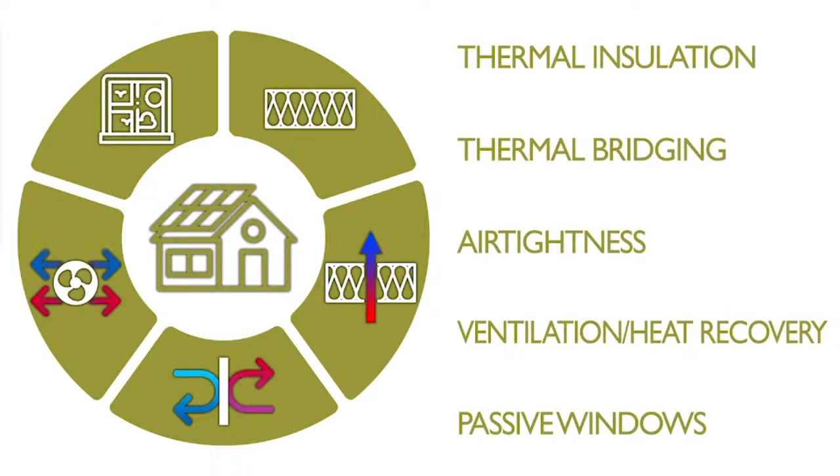Ideally, the space heating and cooling energy requirements can be reduced to the point that passive sources such as solar gain and heat from the building occupants are sufficient for most of the time. The Passive House Institute provides software known as the Passive House Planning Package, or PHPP, to calculate these energy loads, and provides prescriptive guidance and details along with product certification.

Whilst this approach certainly simplifies the process and ensures rigorous adherence to good or best practice, it does not always allow designers the necessary flexibility to balance the full range of project requirements. In such cases, the Passive House guidance and principles can be viewed as best practice recommendations for designing buildings assessed by other means such as national building regulations.

The Passive House guidance itself is fully open source and fully available, so there's no need for official approval to undertake a Passive House project. That said, the verification and certification services provided by the Passive House Institute can serve to greatly simplify the planning and approvals process for such buildings, and reinforce confidence and trust with subsequent buyers and sellers.

So let's now consider how the 5 basic principles can be applied, and what they mean. Thermal insulation is what limits the loss of heat from the building envelope, and is the cornerstone of the fabric-first approach to building design. This approach seeks to maximise the performance of the basic components of the building, rather than relying on mechanical or electrical systems.

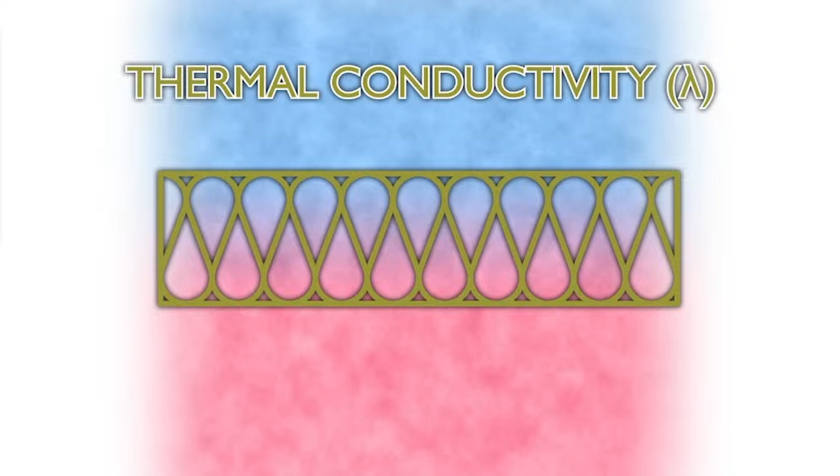The fundamental physical property of insulation material is their thermal conductivity, also known as the K value or lambda value. This property measures how well heat can flow through the material by conduction. In this mode of heat transfer, the heat energy is transferred between the individual molecules of a material by direct contact. Because of this reliance on physical contact, there's a correlation between a material's density and its thermal conductivity.

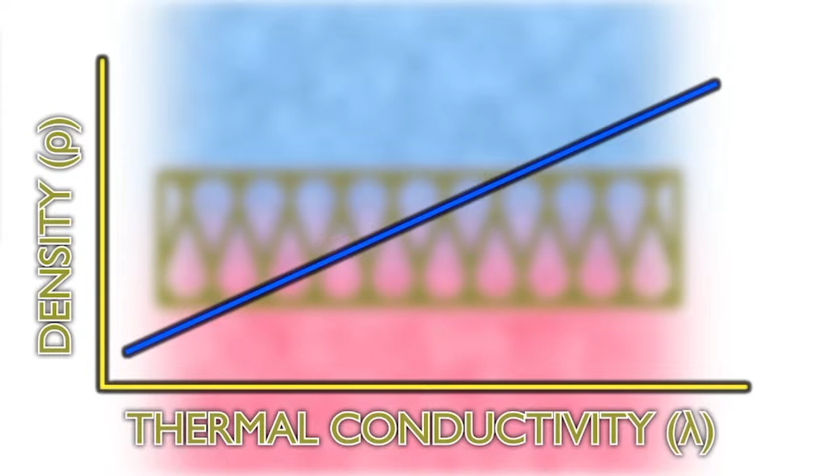Therefore, less dense materials such as foams and fleeces are less able to conduct heat than denser materials like bricks or concrete. Bricks, for example, have a thermal conductivity of 0.77 watts per metre Kelvin, whilst aerogel insulation is far lower at 0.015 watts per metre Kelvin.

Some materials, for example blown rigid foam insulation, may have a thermal conductivity that varies over time as blowing agents escape from the foam structure, so it's important to ensure the correct thermal performance figures are used. Third-party product certification or UKCA documentation will typically give aged performance values if they're relevant to the application.

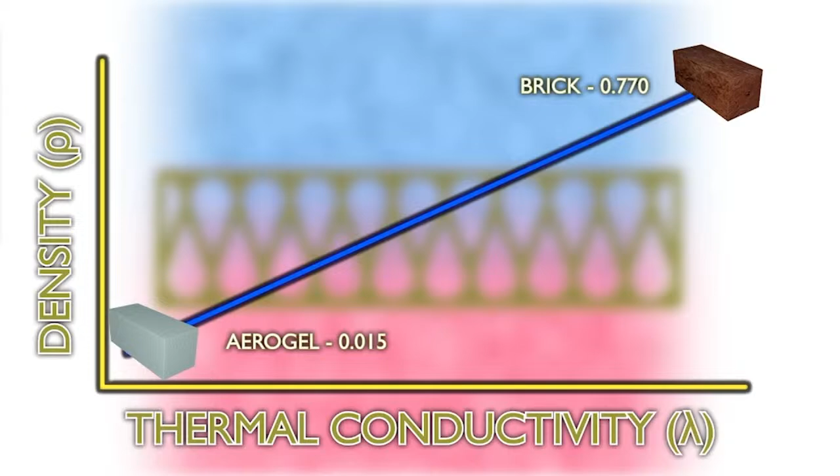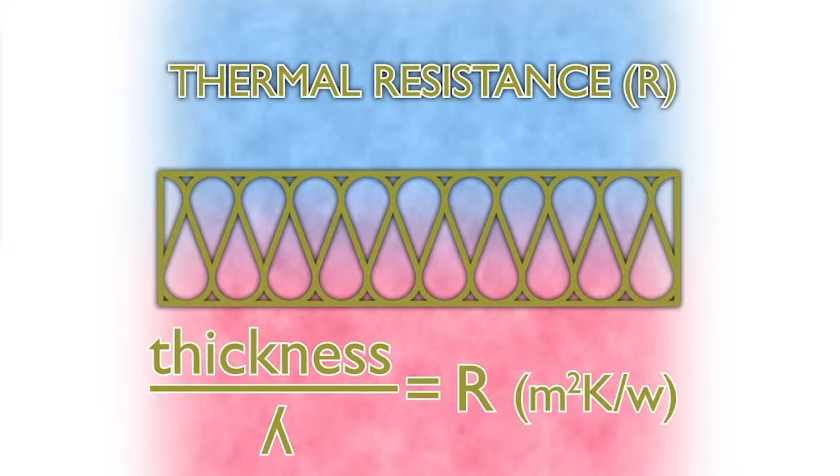Thermal conductivity, however, only looks at the basic material. It doesn't account for the thickness. To factor in the material thickness, we take the thickness in meters and divide it by the thermal conductivity to give us the thermal resistance, or R value, in meters squared Kelvin per watt.

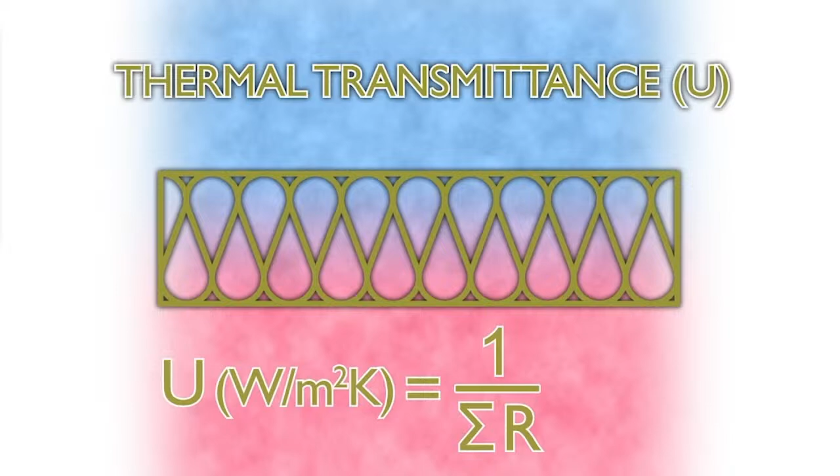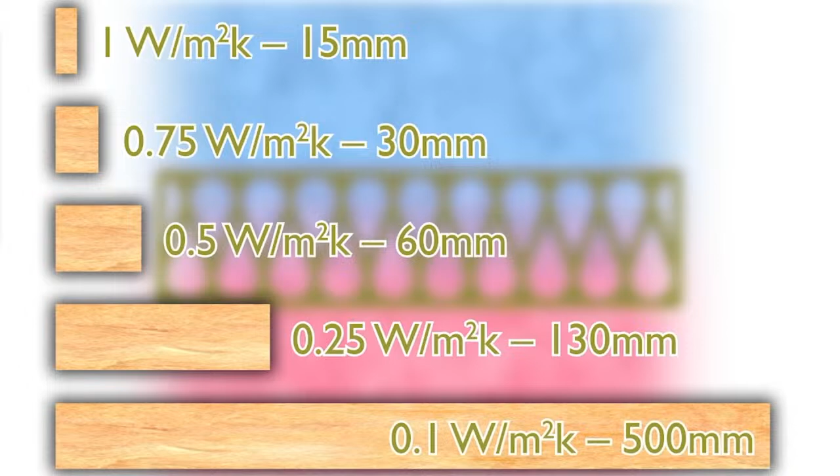The next step is to convert that into a value for an entire wall, for which we use the thermal transmittance, or U value, which is the inverse of the sum of the R values for the different layers in the construction. U values are quoted in watts per meter squared Kelvin. Where R values vary proportionally to thickness of materials, U values do not, so as we move to lower U value, we need to add exponentially more insulation to improve them further.

As an example, the limiting fabric parameter, more commonly referred to as the backstop or worst permissible U value for a wall, given in Approved Document L for England, is 0.3 watts per meter squared Kelvin, and the recommended worst case for passive house is 0.15. The best practice passive house value is considerably lower at 0.06. In practice, compliance with either standard is more complex than achieving a simple maximum U value, but roughly speaking, the worst case U value for a passive house would be considered pretty good under national building regulations.

A thermal bridge occurs either where a material of higher thermal conductivity intersects a less conductive material, or where building elements join, such as at floor zones or corners.

Thermal bridges have two principal negative effects. Firstly, they increase the overall heat loss by providing an easier pathway for heat to escape, and secondly, they create cold spots internally. Condensation and mold growth can occur in these areas, which has a detrimental effect on the indoor environment. The first of these, typically where structural elements like studs in a timber frame wall intersect the insulation, is accounted for via an adjustment in the U value calculation.

This takes the thermal conductivity and proportional area of the bridges and adjusts the U value accordingly.

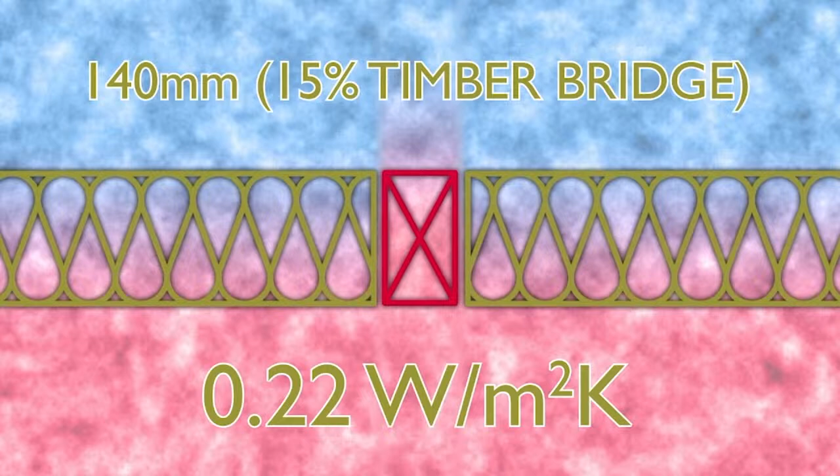If we consider a 140 mm thick panel of rigid foam insulation, if we use this in a typical timber frame wall, the U value when adjusted to account for cold bridging at the timber stud will work out to around 0.22.

On the other hand, if we eliminated this cold bridging but used the same thickness of insulation in, for example, a structural insulated panel system, the U value drops to 0.15, purely due to the lack of repeating thermal bridging at the studs.

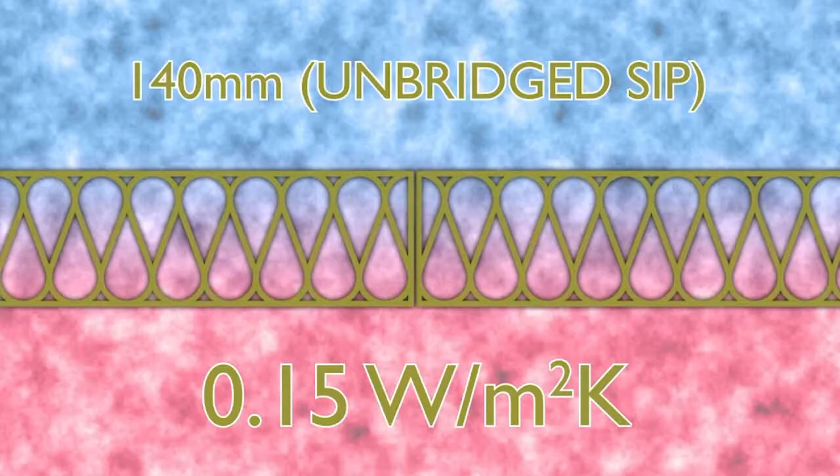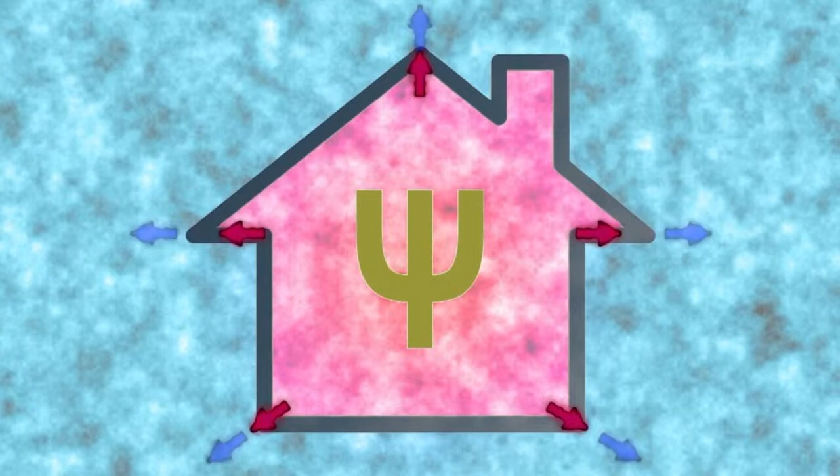Thermal bridging at corners and junctions is accounted for using an additional value for linear thermal bridging, known as a psi value, but in most cases these are addressed using standardized pre-assessed details to limit heat loss.

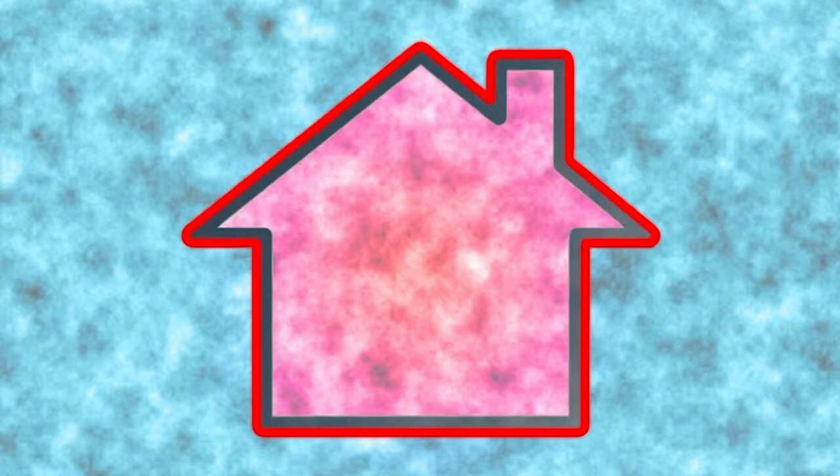The easiest way to visualize the way thermal bridge-free design works in practice is to simply imagine drawing a pencil line around a cross-section of the entire heated envelope of a building. If that can be done without touching anything other than insulation, the design is free from thermal bridges.

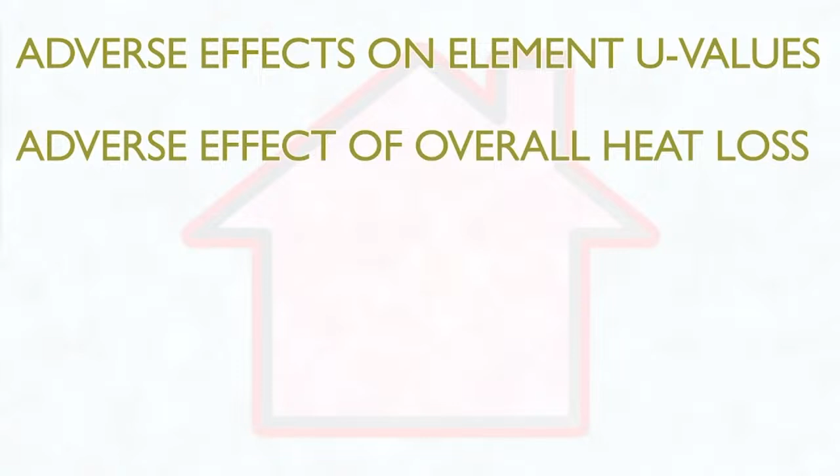Because of the adverse effect that thermal bridging has on both the U value of individual elements and the overall energy performance, whether assessed via PHPP or SAP, reducing cold bridging in low-energy buildings is a matter of not just principle, but also practicality. Getting U values anywhere close to passive house best practice performance levels without restricting thermal bridging is virtually impossible.

But even in cases where designers are aiming for lower standards, the benefits regarding limiting localized condensation are clear. Whatever the assessment criteria, high-performance insulation systems like those that incorporate aerogel insulation have a very important role to play in minimizing thermal bridging by allowing the thermal resistance to be maximized at any given point.

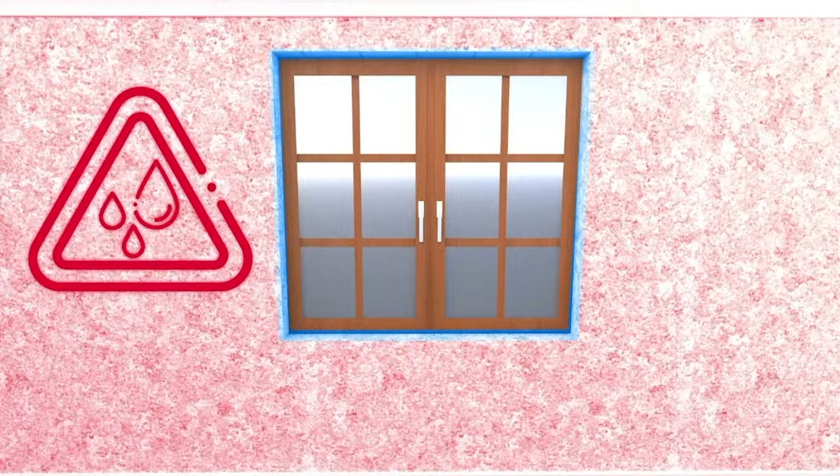In locations such as window reveals and door openings, it can be difficult to maintain a similar level of insulation to that found over the main sections of a wall, leading to these areas being relatively cold. In extreme cases, this can cause the temperature to drop to the point where condensation may occur in these areas, and as fabric insulation levels increase, so does the importance of continuity and uniformity.

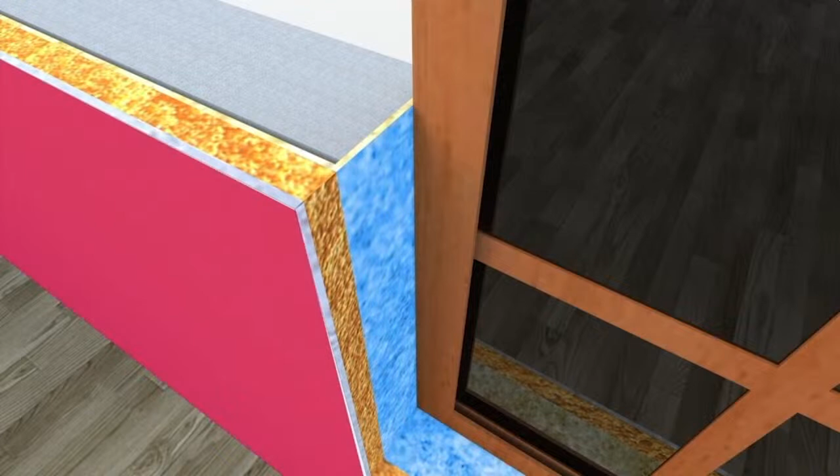Ultra-thin internal wall insulation (IWI) systems that use aerogel insulation provide high thermal resistances in minimal thickness, allowing for a more uniform envelope of thermal insulation performance and minimizing localized drops in R values around complex features. The fire-rated IWI systems also allow this continuity to be maintained where reduced combustibility is required.

This offers significantly higher performance per unit of thickness than conventional fire-rated insulation, such as mineral fibre. Fibrous insulation quilts typically have a thermal conductivity in the range of 0.035 to 0.044 watts per metre Kelvin, whilst aerogel is 0.015 to 0.019, meaning like-for-like performance can be achieved in less than half the thickness.

While big thicknesses of insulation are expected and accounted for in passive and low-energy projects, it's not always possible to maintain such thickness over every part of the structure. Aerogel insulation systems can allow this uniformity to be achieved, and being of comparable permeability to fibre quilt, this can be achieved without compromising moisture movement.

This need to create uniformity of insulating values and prevent cold spots is also an important aspect to consider when specifying the windows in low-energy and passive projects.

When using systems such as aerogels, all product details and installation practices should be reviewed in the context of the Control of Substances Hazardous to Health 2002 regulations. Manufacturers' installation guides and material safety data sheets should be consulted, and such products may require different installation practices when compared with traditional insulation materials. Therefore, specific data for the specified product should be reviewed.

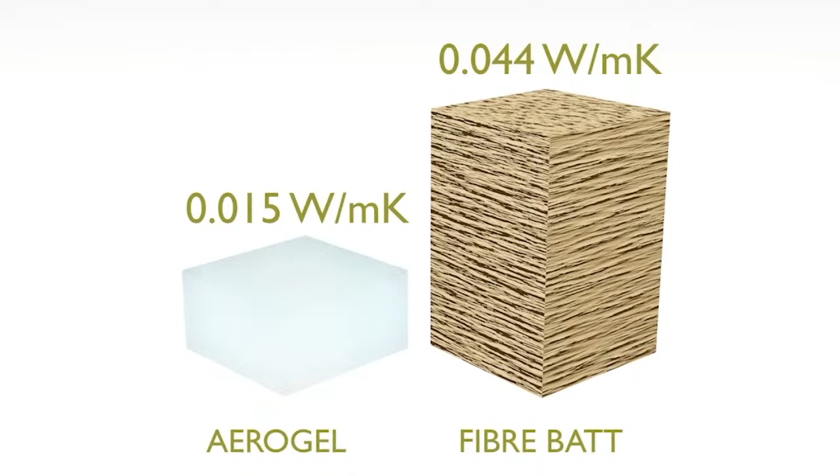While raw silica aerogel is inert and non-combustible, fibrous composite aerogel insulation of the type typically used in construction applications is available with a range of reaction to fire classifications, from Class C to Class A1, depending on the fibrous carrier matting used. For context, most mineral fibre insulation products fall into Class A1 or A2.

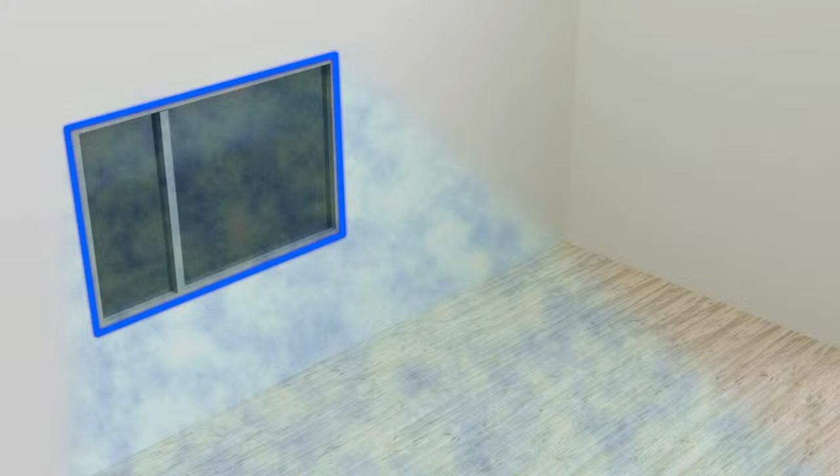Passive and low-energy homes must pay particular attention to the specification of windows used, as poorly insulating windows can not only affect the overall heat loss, but as with cold bridges, can also create cold spots and cold radiation. This phenomenon occurs when the influence of a cold surface can be felt nearby, often leading to a perception that a space is colder than it actually is.

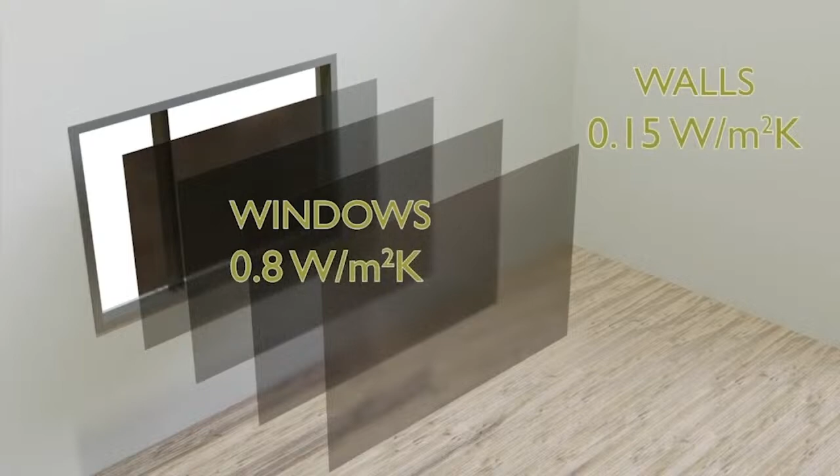Even by utilising multiple layers of glazing, inert gas fills and thermally reflective coatings, windows still typically fall a long way short of the performance of the rest of the building envelope, with the passive house specifications calling for windows with a U value of 0.8 watts per metre squared Kelvin or less, significantly above the opaque elements.

Windows are also important to provide heat input to the building via solar gains, and for this reason passive houses in heating climates like the UK tend to position the majority of glazing facing south in order to maximise this effect. This requirement to maximise collection of solar heat has to be carefully managed though, as highly insulated and airtight homes can be susceptible to overheating if this is not carefully assessed and managed.

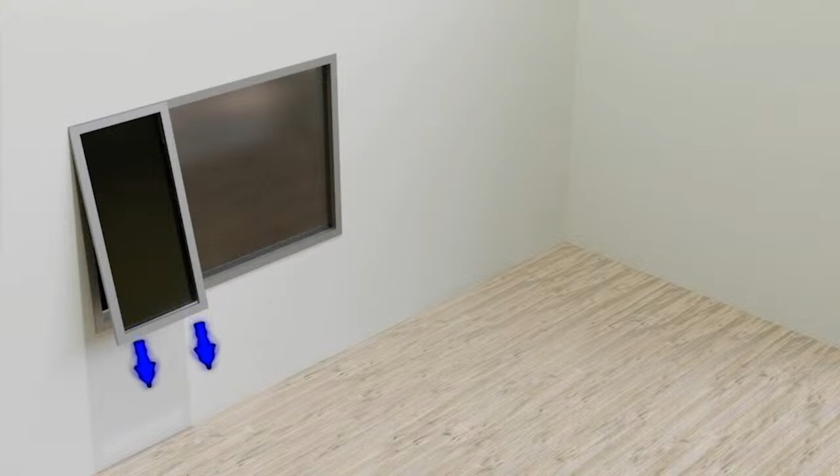It's a common misconception that passive houses do not have opening windows, but in fact the specifications call for at least one opening window per room in the living spaces. Opening windows is among the most cost-effective and simple means of counteracting overheating, and is useful to prevent poor indoor air quality in exceptional circumstances such as large gatherings.

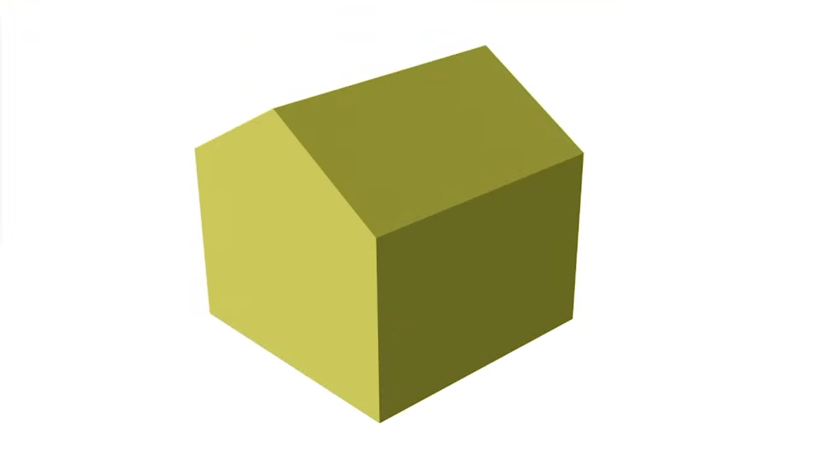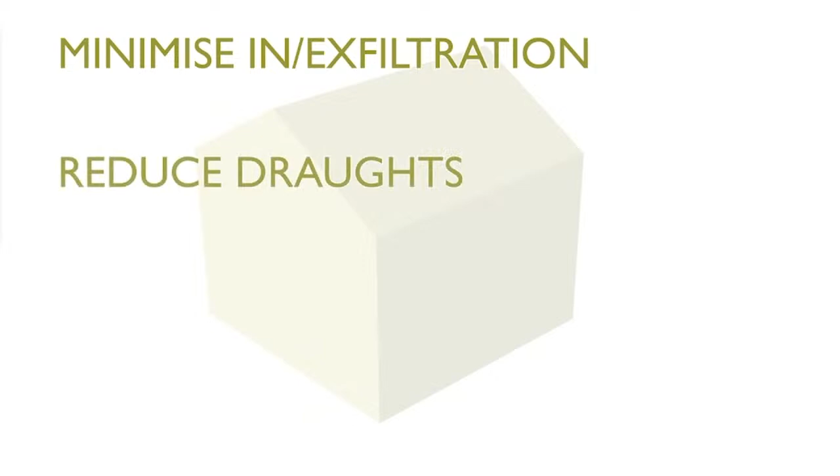That leads on to the next concept we need to consider: the airtightness of the structure. It's often said that airtight buildings can be like living in a plastic bag. However, this is a fundamental misunderstanding of what we mean by airtight buildings. Reducing air leakage simply means eliminating sources of air infiltration and exfiltration over which we have no control, draughts in other words.

A good supply of fresh air is a critical component of healthy indoor environments, and the passive house specification is designed to ensure this is facilitated by controlled and carefully managed ventilation systems with carefully considered impacts on energy performance.

Uncontrolled air movement should be reduced as far as possible. As we've already covered, the thickness of insulation layers increases exponentially with reductions in U value, and after a certain point this becomes both uneconomical and impractical, even in explicitly low-energy buildings. So it's very important that every other factor affecting energy performance is controlled and limited to minimise energy usage.

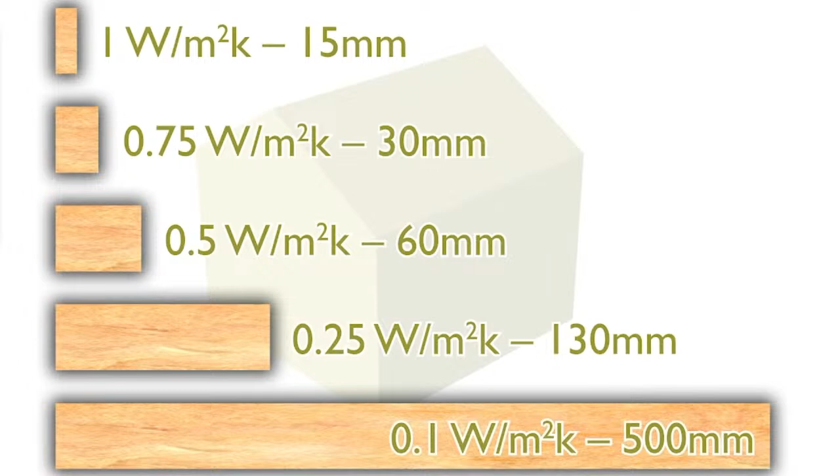In dwellings, there are two main drivers of air leakage: the internal stack pressure caused by the relative buoyancy of warm air and resultant convection, and external forces from the wind. Because warm air is less dense, it will rise upwards in a building and can leak out of any air pathways found at higher levels. Correspondingly, as this air rises, colder air must be drawn into the building lower down.

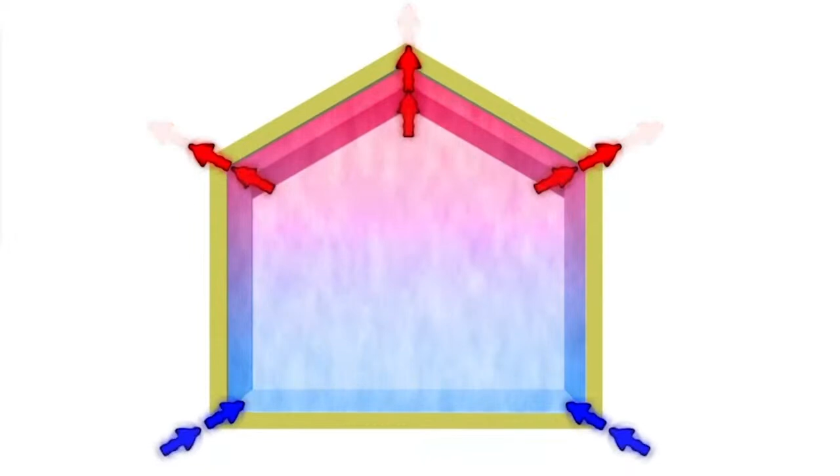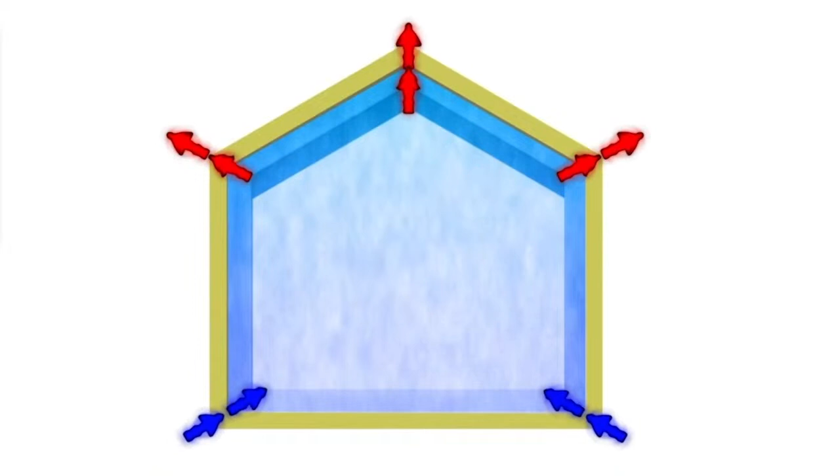As the warmer air will contain significantly more moisture, this outward air leakage could lead to condensation issues as the air leaking cools and deposits liquid water. The cooler air entering the structure lower down will lower the internal temperature in the building, necessitating energy input to maintain the temperature of the habitable space.

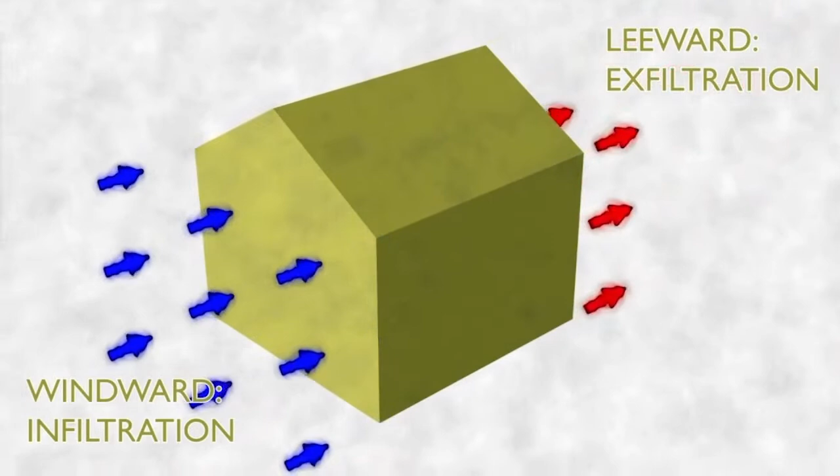Externally, the wind forces acting on the building will have similar effects, but instead of the pressure gradient working from top to bottom, it will be aligned to the wind direction. Cold air will be pushed in on the windward side where there is a positive pressure, and warm, moist air sucked out on the leeward side where the pressure is negative.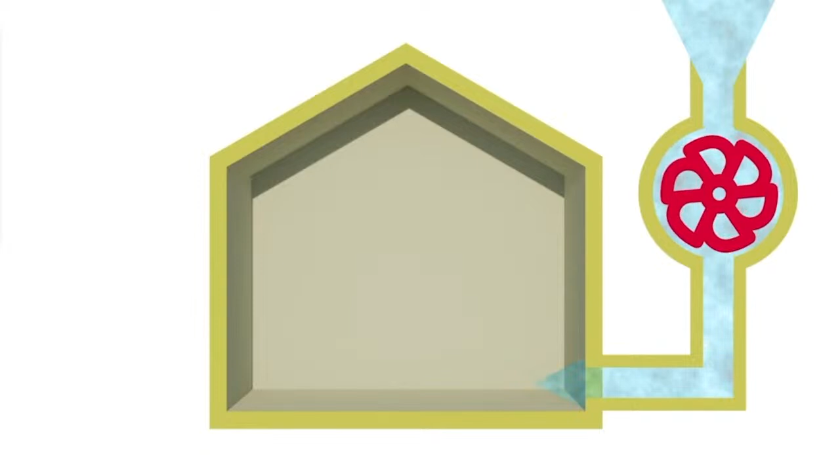Limiting this air movement is a critical part of low-energy design, as even highly insulated buildings will have poor energy performance if the movement of air is not controlled.

Both the building regulations and Passive House standards therefore include pressure testing and minimum performance levels, but there are some important differences. The UK building regulations use a pressure test result known as AP50, which is the volume of air in cubic metres that flows through the building fabric area in square metres in 1 hour, when a reference pressure of 50 pascals is applied.

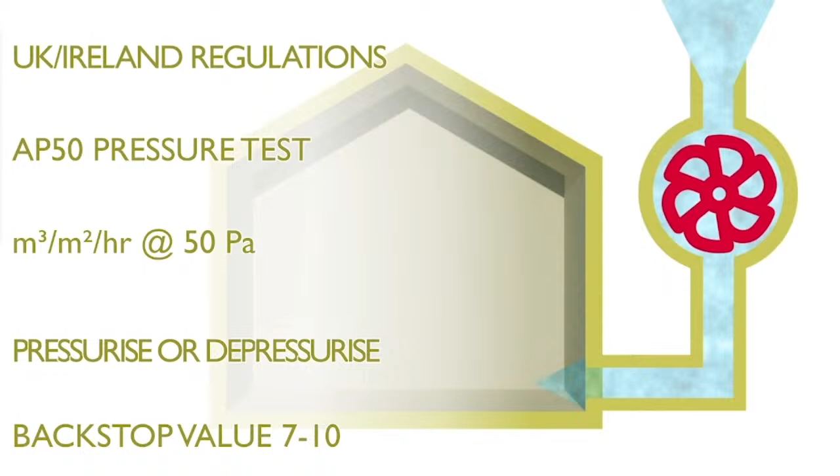This pressure can be applied in either direction, by pressurising or depressurising the building. The backstop value for this is 10 metres cubed per square metre per hour in England, Wales and Northern Ireland. In Scotland and the Republic of Ireland, the preferred or reasonable limit is set at 7, and while it's theoretically possible to comply with a higher value, the necessary trade-offs will generally be unacceptable.

Passive House expresses the air leakage differently, using a standard called N50, which is the air changes per hour through the building's internal heated volume, at the same 50 pascal reference pressure. In Passive House tests, however, the pressure must be applied in both directions, pressurising and depressurising the building, and the two results averaged. The test equipment and physical procedure is largely the same for both AP50 and the N50 test.

So it's perfectly possible to run both simultaneously. But the way the final results are calculated is sufficiently different that conversion between the two is just not possible without access to the source data.

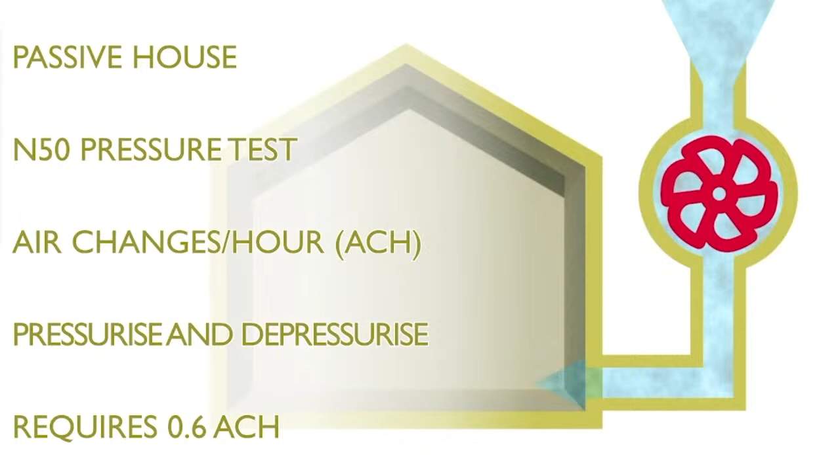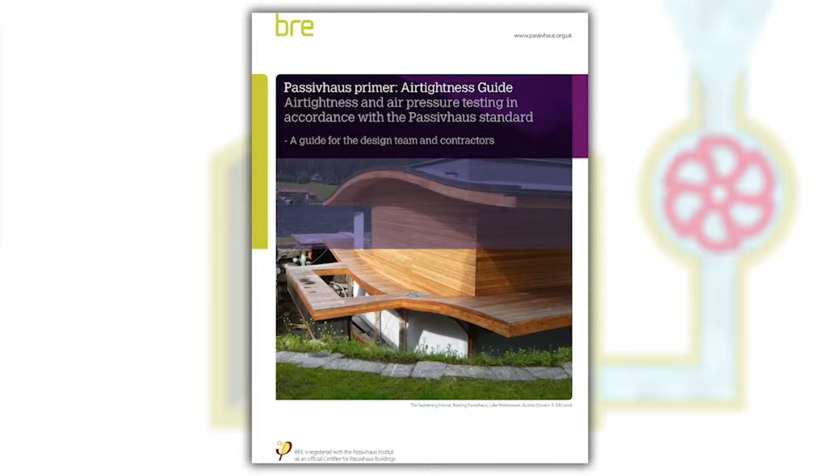The BRE's Passive House Airtightness Primer document, highly recommended as follow-up reading, gives a useful analogy to illustrate the difference in standards. A building with an air leakage rate roughly meeting the UK regulations limiting value of 10 metres cubed per square metre per hour, AP50, will have gaps and cracks equivalent in area to one 20 pence piece per square metre of the floor area. In contrast, a Passive House meeting the required 0.6 air changes per hour N50 standard will have gaps equivalent to an area of a 5 pence piece every 5 square metres of floor area.

Airtightness and vapour control. There are numerous ways of making a building airtight, and finding the most appropriate method to apply it to a given project is usually a matter of balancing a variety of competing requirements. The most important of these is considering the effects of reducing air leakage on the transfer of moisture around the building. Historically, most buildings had high levels of airflow, both intentional and incidental, for example from open chimneys. Modern buildings where this airflow is not present require more careful, holistic consideration of hygrothermal properties in relation to air movement.

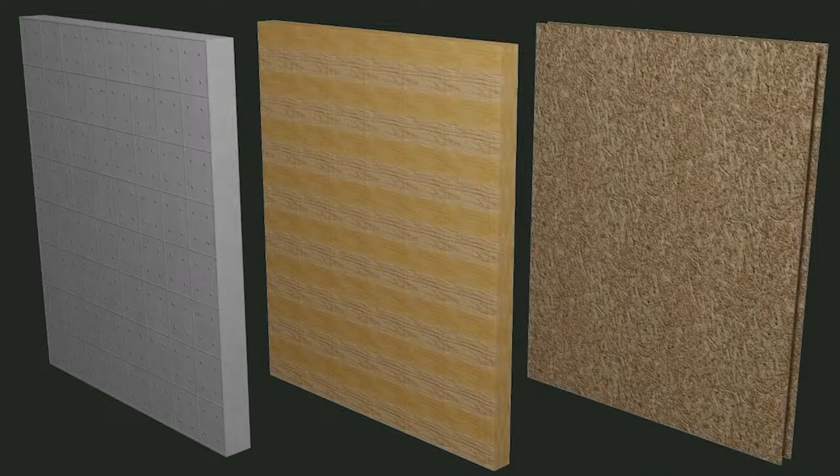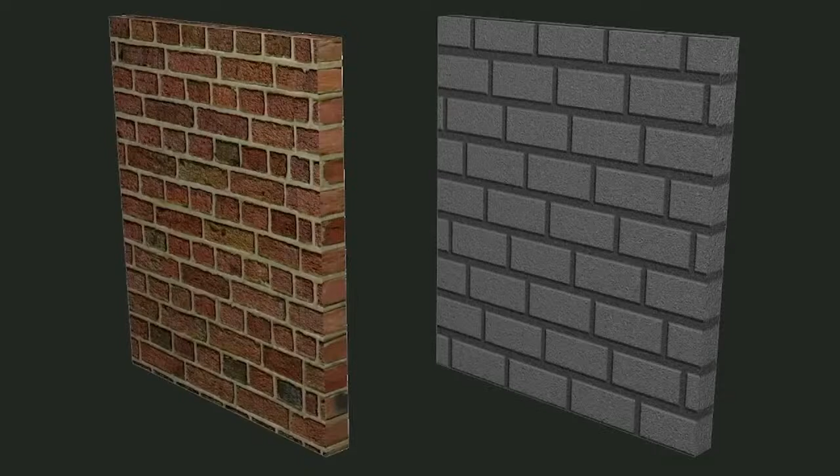Some building materials such as cast concrete, cross-laminated timber and structural insulated panels have an inherent advantage when it comes to air leakage, as the basic materials involved have low air permeability. Others, like blockwork or brickwork, are more permeable, so require additional measures to control air leakage. In all cases, though, junctions, services and the nature of the on-site assembly process still pose challenges to achieving a low air leakage rate, even when using the most impermeable base materials.

Air leakage performance cannot be considered in isolation, and in parallel it's critical to address moisture control. This is covered by Part C in England and Wales, Section 3 in Scotland, and Part F in the Republic of Ireland. It's also Part C in Northern Ireland, but this is a different set of regulations to that used in England and Wales. In all four cases, specifiers are referred to British Standard BS 5250.

This document, the most recent edition of which is BS 5250-2021, is the Code of Practice for the Management of Moisture. Prior to the 2021 edition, this was simply control of condensation, but this has now been expanded to cover all sources of moisture that can affect buildings. This reflects an increasing recognition that the effects of heat transfer and the flow of air and moisture around structures are interlinked and should be considered holistically at the design stage.

To this end, the standard also defines connective and systemic effects. Connective effects being the effects of changing conditions at junctions between different building elements, and systemic being effects of an action on the whole building or parts not directly connected, due to changes in the hygrothermal condition of the inside of the building. Both these serve to raise awareness of the interconnected nature of moisture in buildings, although the standard does note that assessment methods for the impact of these effects is currently at an early stage.

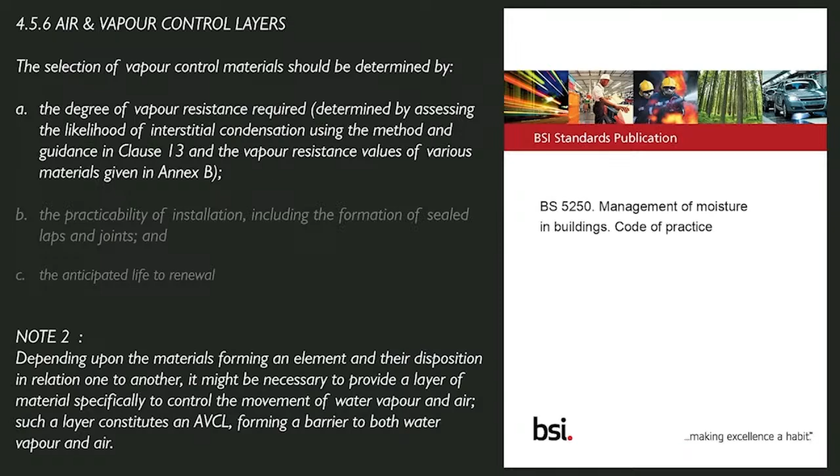The second important consideration is the practicality of installation, basically how easily the theoretical design can be realised on site. BS 5250-2021 introduces the concepts of ADT performance, or as-designed theoretical, and ABIS performance, as-built in service. This is an important distinction as these can be very different. In terms of AVCL performance, this relates mainly to the simplicity of sealing laps and penetrations, and whether or not the need for complex and difficult installation processes can be designed out. It's also important to ensure the design and subsequent installations are robust enough to meet their lifespan requirements.

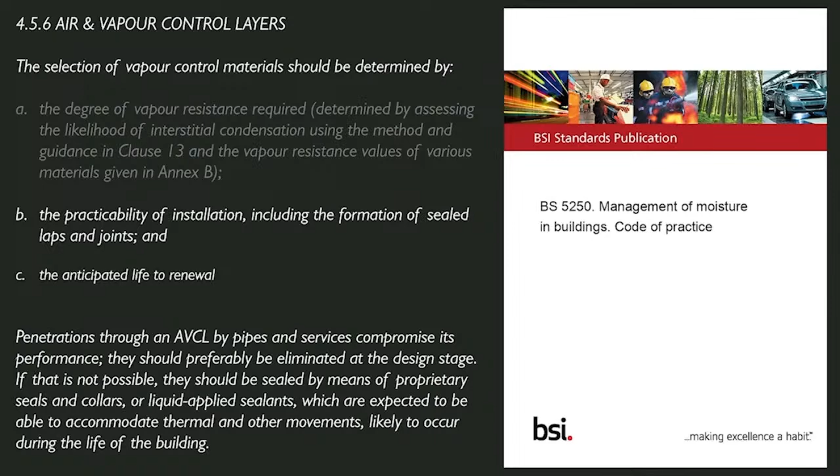Lastly, in Notes 3 and 4, BS 5250-2021 illustrates the many forms air and vapour control layers can take. In essence, every layer in the building element plays a role in the management of air and vapour transfer to some extent. Assessing and balancing the performance and practicalities of each part is key to a successful design, and this is particularly true at the higher levels of performance required by passive and low-energy buildings.

Note 4 also clarifies that while most specific AVCL membranes tend to be impermeable to both air and vapour, it's also possible for membranes to be airtight yet vapour permeable. This again gives designers important flexibility in where they position and how they install the airtight layer, as the air control and vapour control functions can be separated and performed by a variety of components throughout the element. We'll come back to this later, but now let's consider the assessment of vapour transfer.

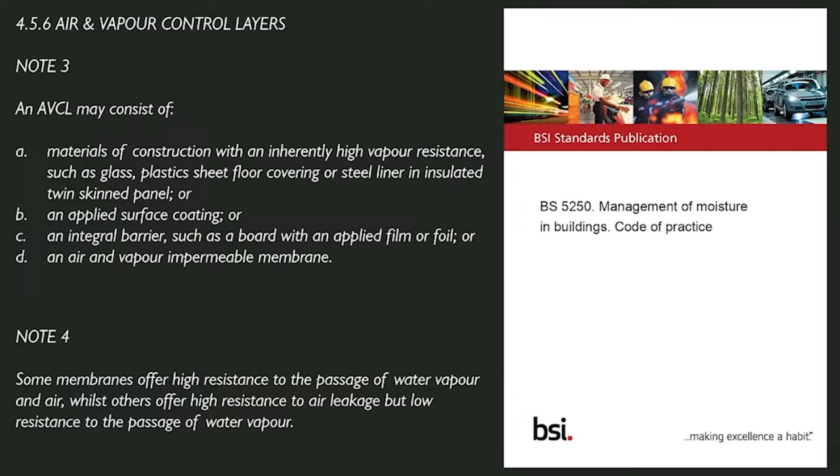BS 5250-2021 references two standards for condensation risk: BS EN ISO 13788-2012, Hygrothermal Performance of Building Components and Building Elements, Internal Surface Temperature to Avoid Critical Surface Humidity and Interstitial Condensation Calculation Methods; and BS EN 15026-2007, Hygrothermal Performance of Building Components and Building Elements, Assessment of Moisture Transfer by Numerical Simulation.

The simplified Glaser method, given in BS EN ISO 13788-2012, is considered by BS 5250 to be generally acceptable for most types of constructions. However, BS EN 15026-2007 can be used to gain greater detail as to the hygrothermal performance.

In the Glaser method, the thermal and vapour transfer properties of the various materials and simplified environmental conditions are used to model the temperature gradient through the element and also the dew point line. Dew point is the temperature at which the air will become saturated and condensation will occur.

In our example wall here, a cross-laminated timber panel with insulation external to the structure, the dew point will generally occur in the outer ventilated cavity, if at all. This is because the insulation is positioned such that it keeps the more vapour-resisting inner layers warm enough to prevent condensation. This makes this type of wall a very robust hygrothermal solution where high levels of insulation are required.

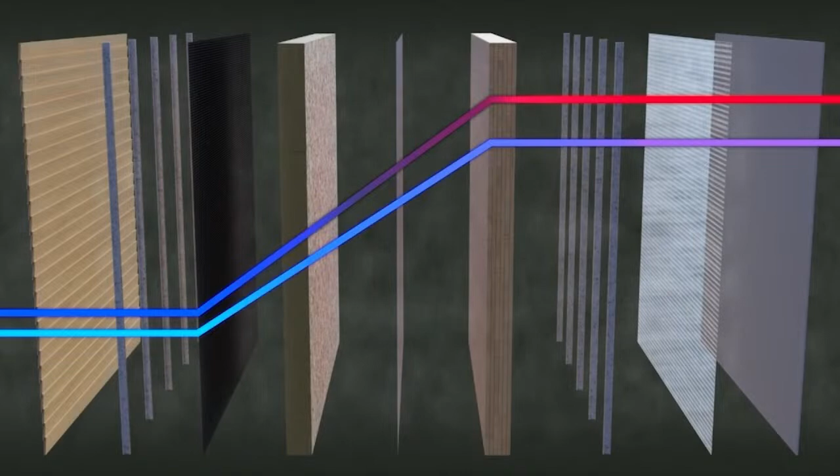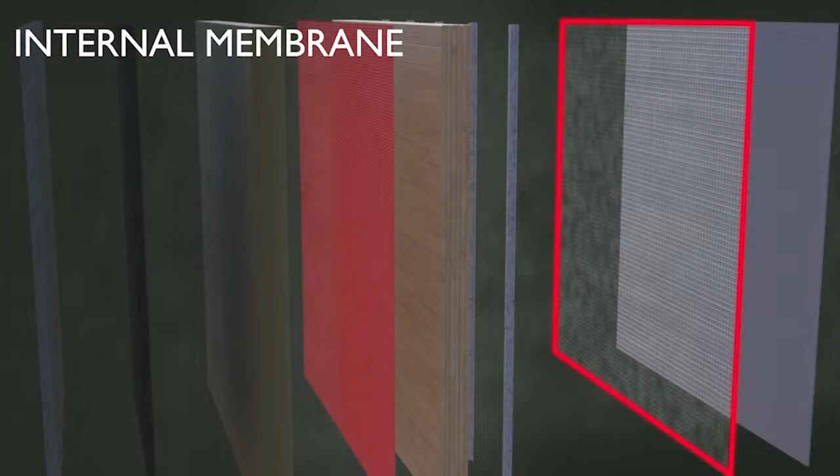Let's now move on to consider how the positioning of construction membranes in a wall affect the required performance characteristics. Firstly, we have the traditional vapour control layer position on the warm side of the insulation. This is the most common approach historically, and membranes used in this location are usually airtight and vapour impermeable. This approach works by ensuring warm, moisture-laden air cannot reach the colder outer parts of the wall construction where it can condense.

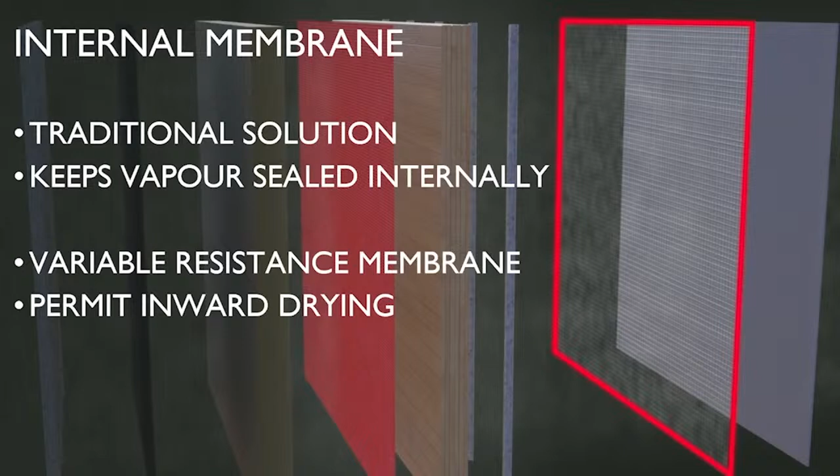Variable vapour resistance membranes have become available that can become more or less vapour permeable in response to environmental conditions. These membranes block the passage of moisture vapour in winter when condensation risks are highest, but allow some degree of moisture transfer in warmer summer conditions. This can help the building fabric dry out in either direction, helping remove construction moisture and moisture from external sources such as rainfall. The principal downside to this location of membrane is in the detailing and sealing required during installation.

Internally, there are substantially more penetrations for services and structural elements. While this can be mitigated to a certain extent by using service voids, relocating service runs away from external walls, or using a variety of tapes and gaskets, this still introduces additional complexity throughout the process.

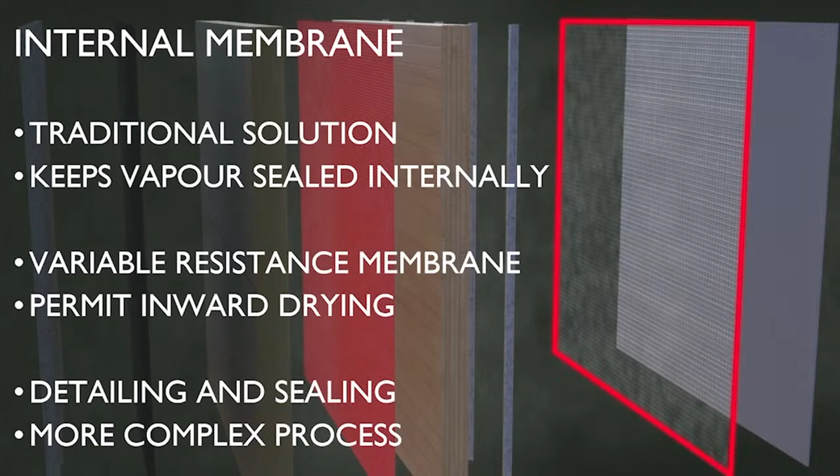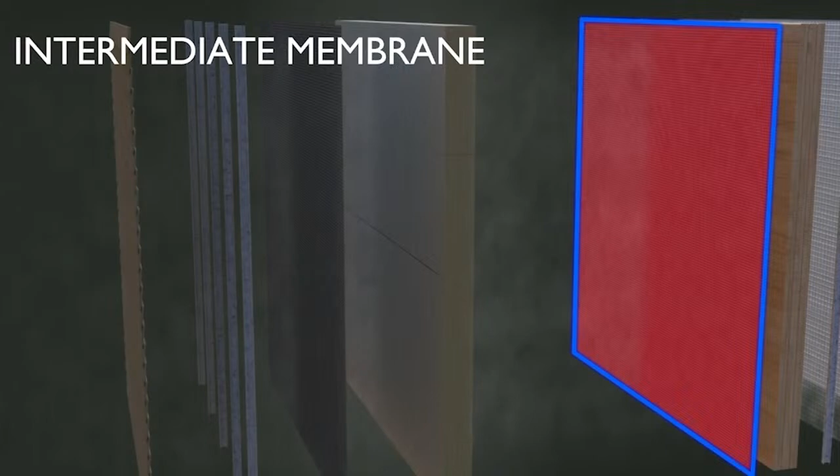If we move the airtight layer to an intermediate position in the construction, such as over a structural insulated panel, or as shown here over cross-laminated timber, we can greatly reduce the number of services that need sealing, and possibly also simplify sealing membrane joints and laps, as there would typically be a more solid substrate to fix against. If the membrane is self-adhesive, this process becomes easier still.

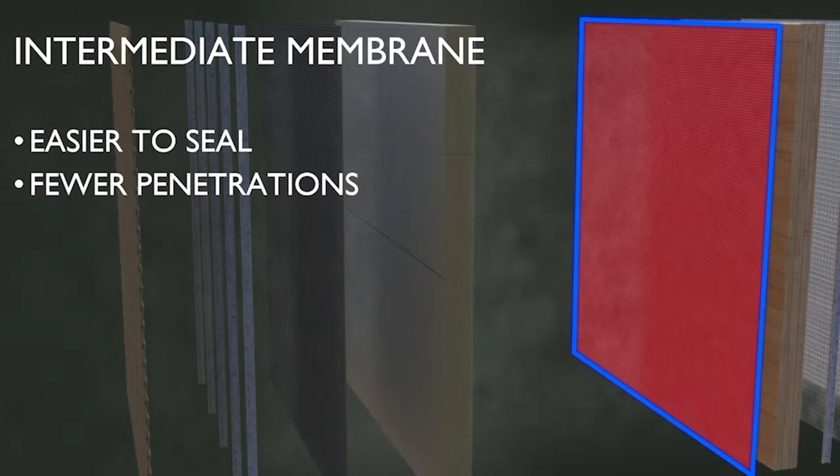On the other hand, moving the membrane to this position does mean the vapour permeability must be considered more carefully. In our CLT example here, the membrane can either be vapour permeable or vapour tight, as the majority of the insulation will be further outside. The precise level of vapour resistance needed will depend on how vapour permeable the CLT panel is. If the panel has sufficient vapour resistance to limit condensation risks, then a vapour-tight membrane may not be required at all.

If there is insulation present on the warm side of this membrane though, such as in a SIP wall or timber frame, then the membrane should be vapour permeable to prevent trapping moisture within the insulation layers. This is particularly true if additional layers of insulation are specified in a warm frame construction. Positioning the vapour-permeable airtight layer in this location, with insulation to either side, makes the correct balance of vapour permeability throughout the construction very important, and project-specific condensation risk analysis calculations are recommended.

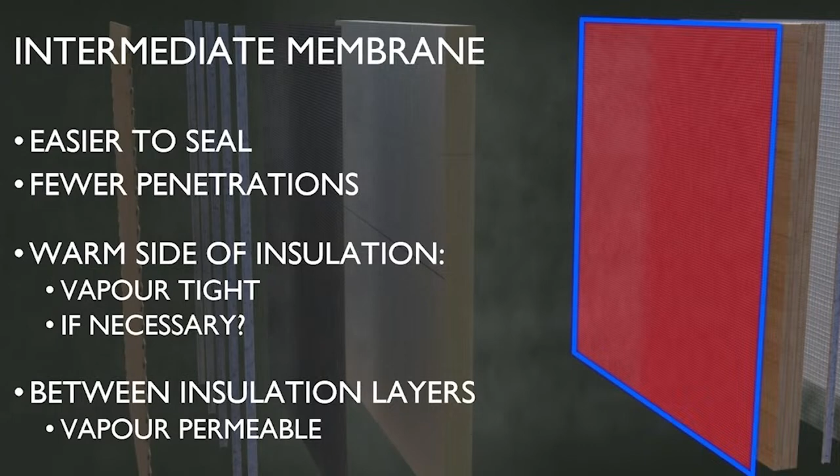If additional detail or analysis over a multi-year time period is required, the EN 15026-2007 method can be used. But it should be recognised that these calculations require a higher degree of experience and expertise to undertake than the simpler Glaser method analysis. The final possibility for the location of the membrane is outside the heated envelope in the cavity behind the outer cladding or rain screen.

Being on the cold side of the insulation, membranes in this location must be vapour permeable to prevent trapping moisture, and weather resistant to provide temporary protection during construction.

Providing this temporary weather protection means there will often be a membrane in this location, regardless of air and vapour control requirements. So if the airtight layer is positioned elsewhere in the construction, a membrane in this location need not necessarily be airtight, although it may help reduce convective heat loss around the insulation if it is.

Membranes used in wall construction may also be subject to fire performance requirements, depending on the project, and this is especially true of membranes used in this location.

Although Regulation 7.2 requires the main materials which become part of an external wall of relevant buildings to have a fire classification of A2S1D0 or A1 in accordance with BSEN 13501-1 2018, there are several exemptions granted in Section 12.16 of Approved Document B, Volume 2, Section B4.

From the approved document, a relevant building means a building with a story, not including rooftop plant areas or any story consisting exclusively of plant rooms, at least 18 metres above ground level, and which contains dwellings, contains an institution, or contains a room for residential purposes, excluding any room in a hostel, hotel or boarding house.

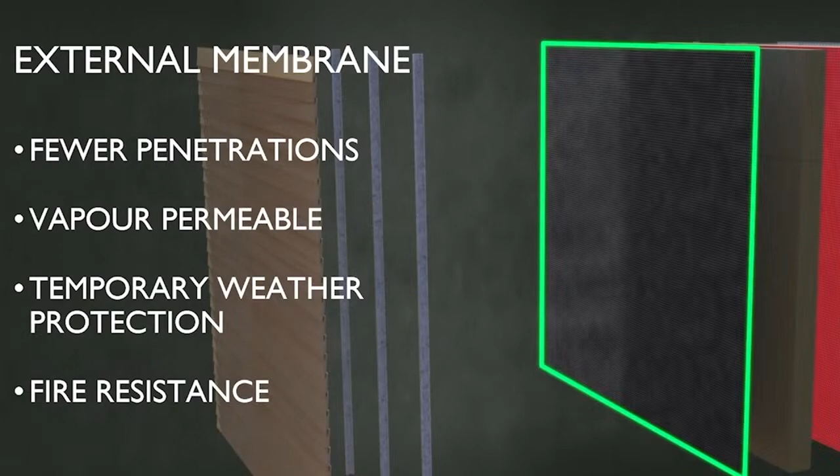These exemptions allow designers a little more flexibility to balance fire performance against other project requirements, but it is especially important that the fire classifications and testing are up to date and based on relevant test criteria. Fire testing information and certification for materials should be available from system suppliers.

The placement of the air and vapour control layer or layers within a building should be considered in the wider context, not just of the transfer of heat, air and moisture, but also with regards to installation practicalities and long-term robustness. As performance levels in terms of both fabric insulation and envelope airtightness increase to the level required by the Passive House standard, minor defects in construction can have a far greater impact on the long-term as-built performance.

Because of this, designers increasingly must consider not just how to design structures which offer the best theoretical performance, but also which can be constructed in the simplest and most durable manner.

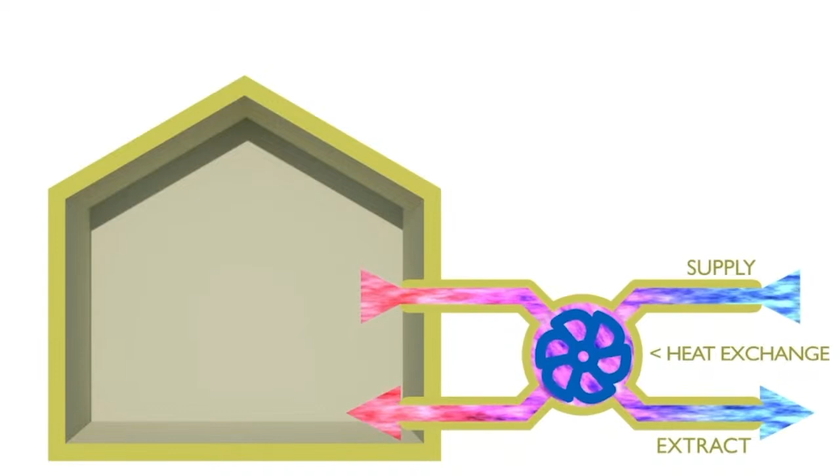The last of the passive principles is the use of ventilation with heat recovery, in which heat from extracted airflow is recovered through a heat exchanger and fed back into the building via the incoming supply air. This improves the efficiency of the building by reducing heat wasted by the extract airflow, and such systems are generally required as part of the Passive House certification.

Without heat recovery ventilation systems, it can be difficult to meet the space heating energy requirements. When using this kind of system, it's important to ensure end users are made aware of maintenance requirements. Most MVHR systems will require regular filter changes and other servicing to ensure they're operating correctly. These requirements will vary between systems, however, so specific advice should be sought from the supplier of the specified system.

This requirement in the Passive House specification often leads to an incorrect assumption that all airtight buildings require mechanical ventilation. If designers are not working to the Passive House certification specification, then various other options for both ventilation and heat recovery are available. In fact, it's perfectly possible to have good indoor air quality at low air leakage levels with a fully passive ventilation system, provided this is designed into the building early enough.

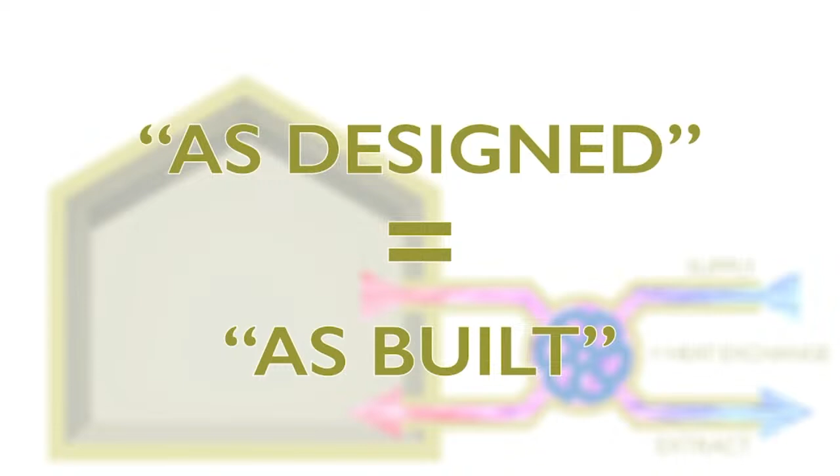What is important here is ensuring the building as built meets what is specified. If you design the building heating and ventilation systems to operate with an air leakage rate of 3 metres cubed per metre square per hour, but when tested the building only achieves 7, then problems can arise as highly optimised heating systems may not be able to compensate for this shortfall.

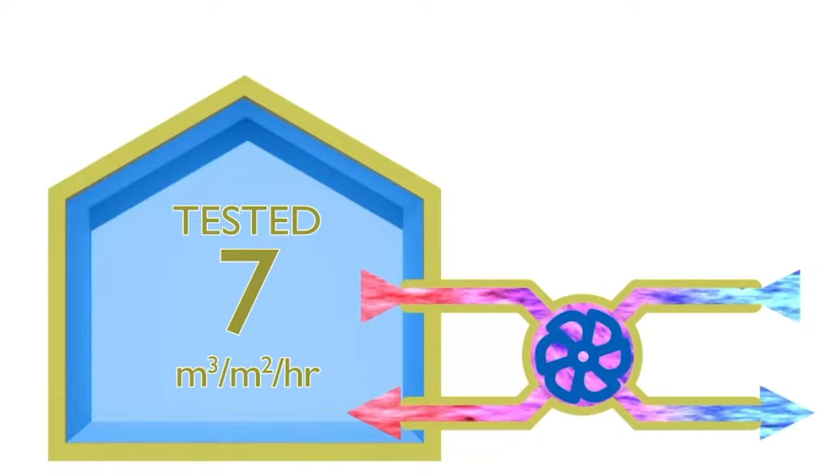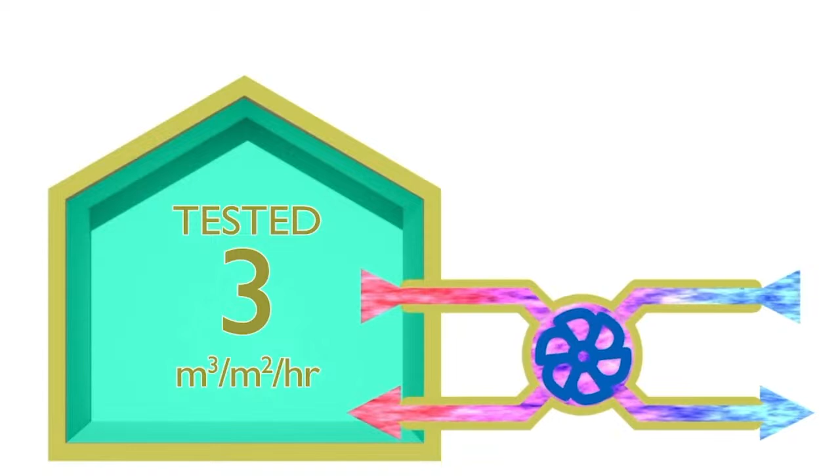Conversely, if you design to 7 metres cubed per square metre per hour and actually achieve 3, then ventilation may not be able to supply sufficient fresh air to provide acceptable air quality. What is important is ensuring the building is constructed within its design specification, thus allowing all the building systems, active or passive, to perform as intended.

Heat pumps. A further possibility for the recovery of heat to lower the energy use in a home is to use a heat pump in the heating system.

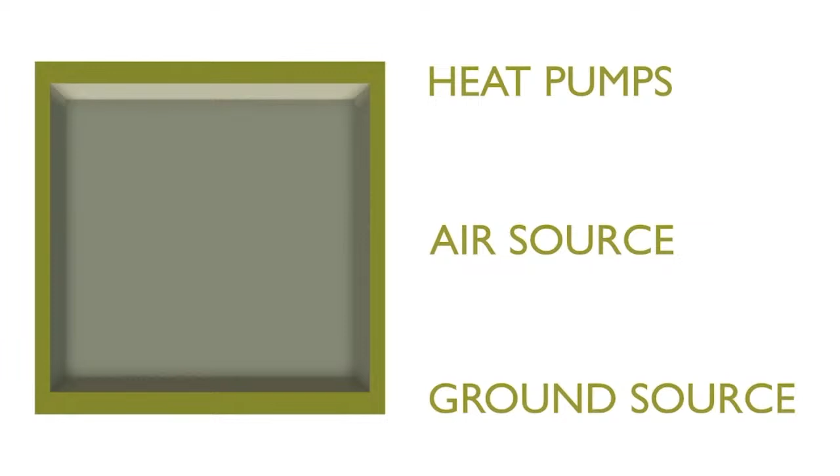There are two primary types of heat pump, air source and ground source. Air-sourced heat pumps, or ASHPs, use heat exchanging fluids and compressors to extract heat from the ambient external air and supply it to the interior of the home, either via a more or less conventional central heating or underfloor system in an air-to-water supply system, or via warm air circulation in an air-to-air system.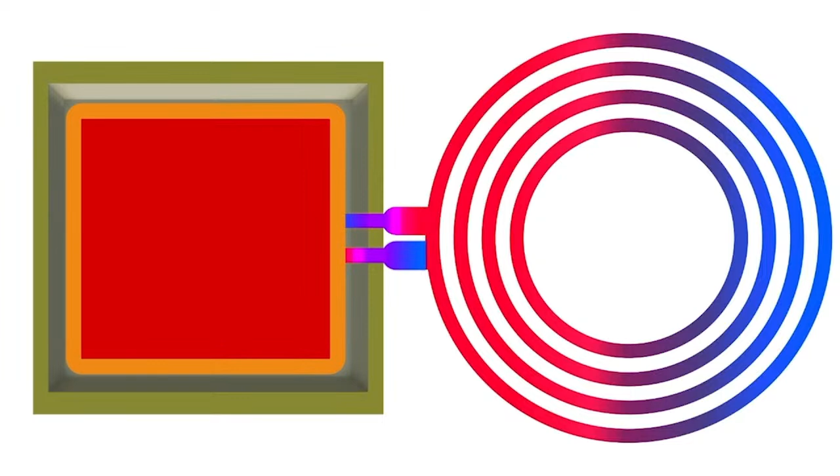Ground-sourced heat pumps recover heat from collector loops buried underground. Fluid is circulated through these loops and picks up heat from the ground, which is then fed through a compressor and heat exchanger and used to heat the home.

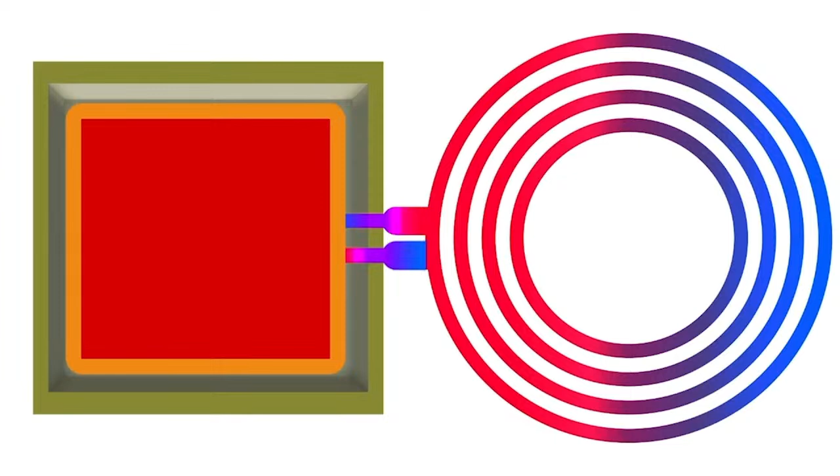Both of these systems commonly use a large water tank to act as a heat store, using the thermal mass of the water to retain heat energy until it is required by the heating and hot water systems in the house. Ensuring this heat store is well insulated is a critical part of ensuring these systems operate efficiently.

Both ground and air-sourced heat pumps are designed to operate at lower temperatures than fossil fuel or electric heating systems, and this lower operating temperature works particularly well with underfloor heating systems. These lower temperatures, as well as the lower running costs, mean these systems are typically designed to run continuously or almost continuously, and have less scope than traditional heating systems to boost their output and to meet additional demand.

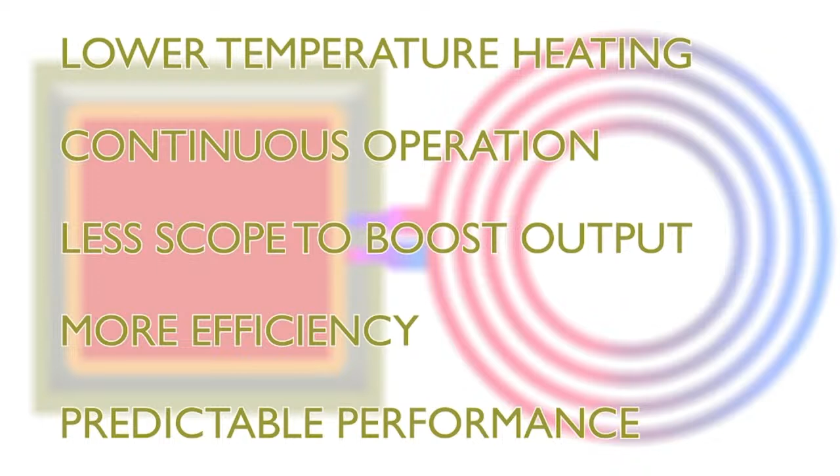The better the energy performance of the dwelling they are fitted to, the more effective they will be. This makes these kinds of systems a good fit for low-energy homes. The relative lack of spare heating output also reinforces the importance of predictable and reliable energy performance at the specification stage, as the only practical solution to an under-spec'd underfloor heating system is often the use of auxiliary electrical or solid fuel heating, which may not be a good fit with an energy and ecology-focused project.

That brings us to the end of today's presentation, and we'll now move on to the Q&A session.